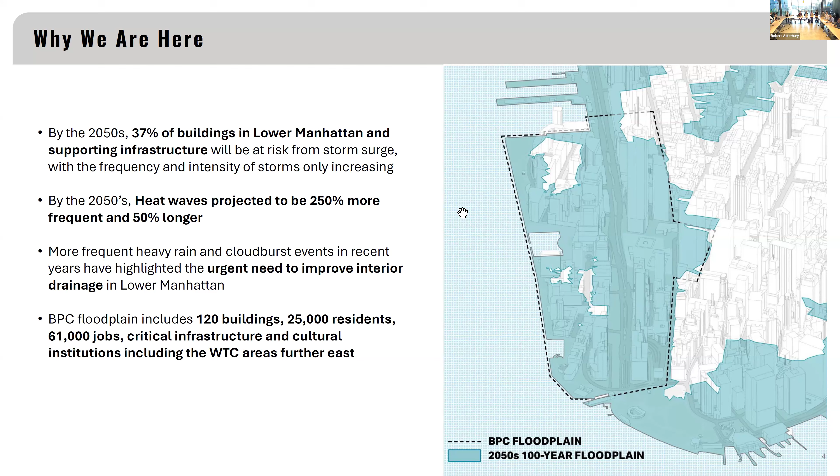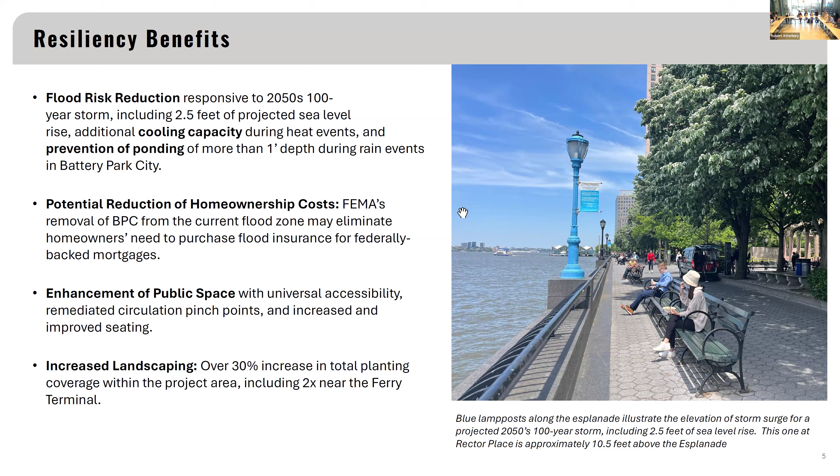The primary benefit is to provide flood risk reduction to everything within that floodplain. But there are also peripheral benefits, including potential reduction of homeownership costs when we remove that area from FEMA's maps, and attendant enhancement of public space. As we move along, we have the opportunity to refresh some of Battery Park City's public realm, as well as increased landscaping. As you know, Battery Park City is about one third parks, so parks, parks operations, and landscaping is always front of mind for us.

For those unfamiliar, the Lower Manhattan Coastal Resiliency Project is composed of 6 projects, 2 of which are Battery Park City projects. The South Battery Park City project, shown in the lower left, is just getting wrapped up now, and we're just breaking ground on the Northwest project, which I'm here to talk about today.

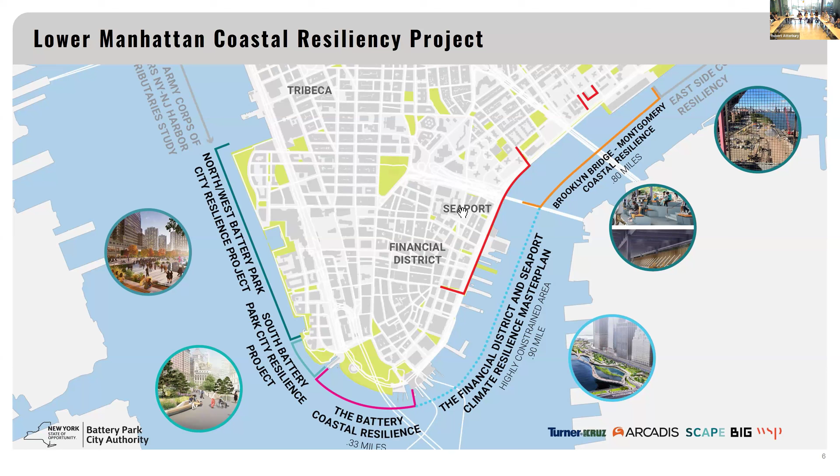Planning for this project, part of a series of projects, goes back to 2007 when it was first conceived at the city level, and then Superstorm Sandy accelerated progress there.

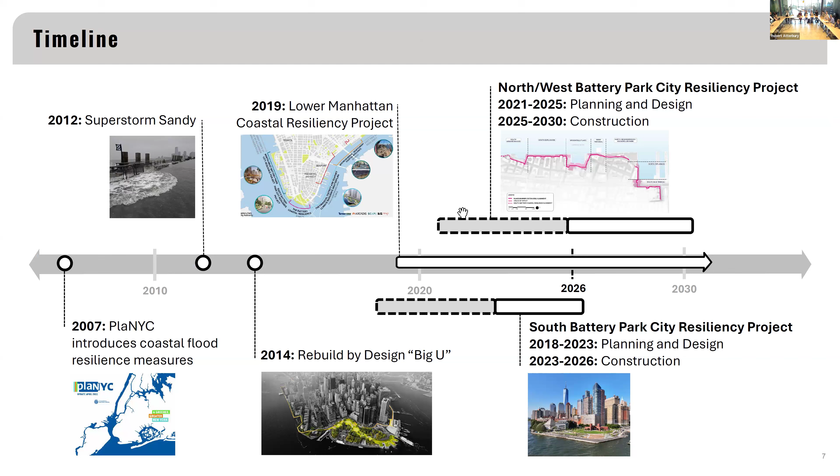You can see the thicker bolded lines are the South Battery Park City project and also the Northwest on the north side. As you might imagine, a project of this scale, spanning 1.4 miles of flood wall, has required cooperation among several entities from the federal to the state to the city level. Hudson River Park Trust has been a very nice partner throughout this.

We've also had a pretty robust community engagement effort, many large public meetings, a lot of site walks, ongoing CB1 dialogues, and HRPT specifically. I'm proud to say this is our 4th year in a row that we've come to HRPT in some public capacity.

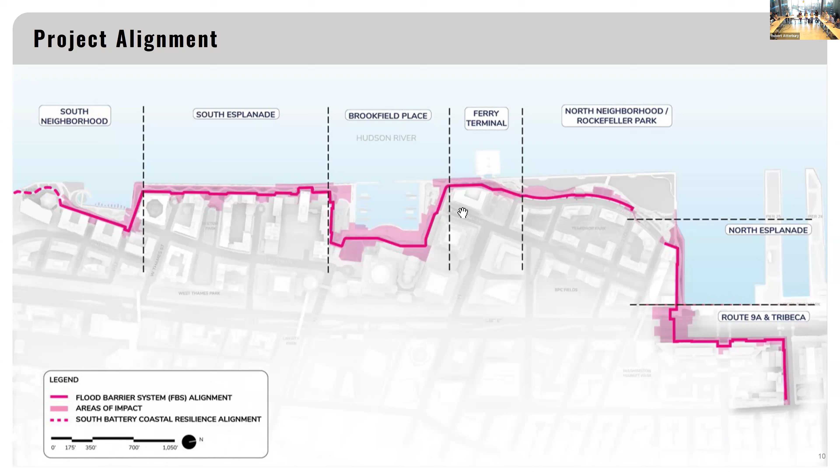Just as a reminder, this is the alignment. The dashed line on the left-hand side is where we tie into the South project, and then it's 1.4 miles along our esplanade until we get to the North Esplanade and across Route 9A into Tribeca. I'll be talking about that North Esplanade area today.

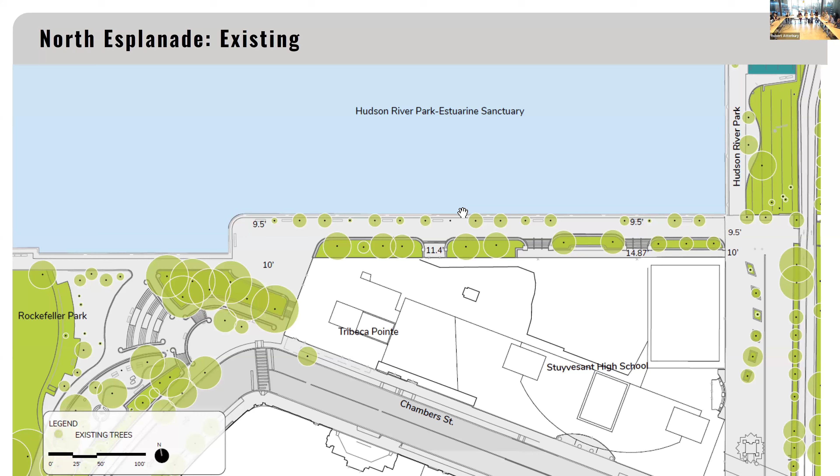So let's talk about the North Esplanade. This is existing - you're all familiar with the Hudson River Park Estuarine Sanctuary to the north. And then you can see the geometry has changed somewhat.

There's a dashed red line of what's existing now, and then you can see the geometry and space of what will happen after construction. Also to point out here, the red line that goes across Stuyvesant High School and across Route 9A, that's our flood wall, including gaps where there are deployable elements that only need to be deployed when there's a storm surge or a significant storm.

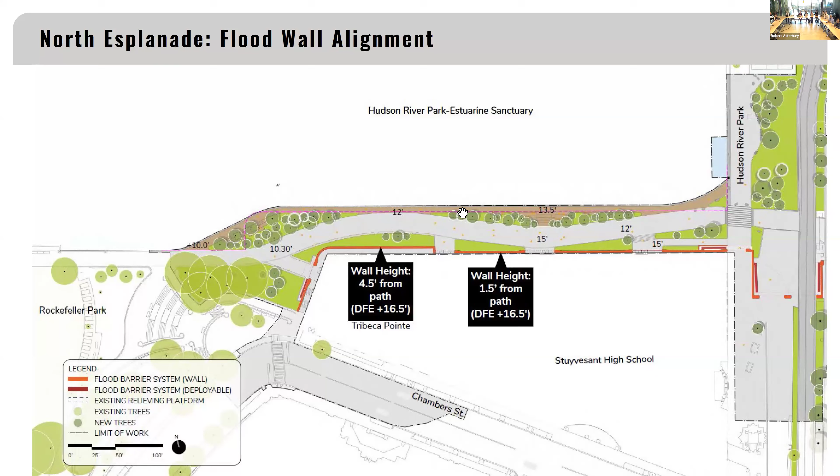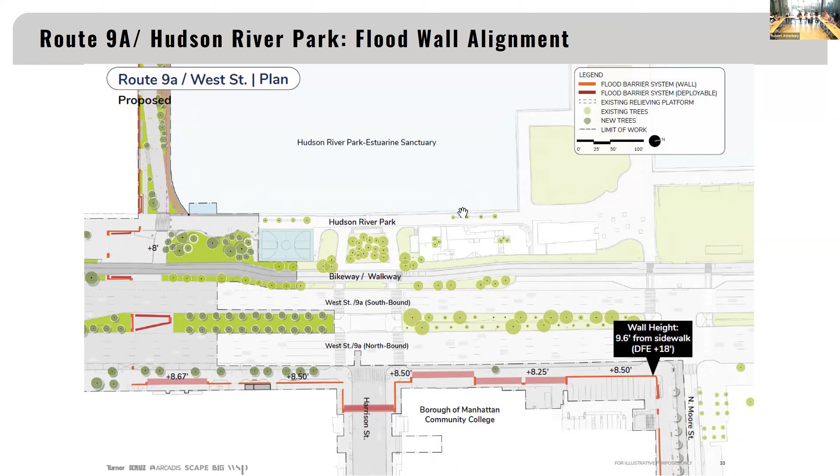Here's the proposed condition - this is a little bit confusing perhaps, but north is to the right here, and you see West Street 9A in the foreground and the Hudson River Park Estuarine Sanctuary on the top. You can see from Stuyvesant in the top left, we jog across 9A with a few deployables, a few rolling gates, a few swing gates, and then across BMCC heading north to North Moore Street.

Here is the relationship between the Hudson River Park Estuarine Sanctuary and the project. You can see we're bedfellows, and so we're happy to be here to present the progress.

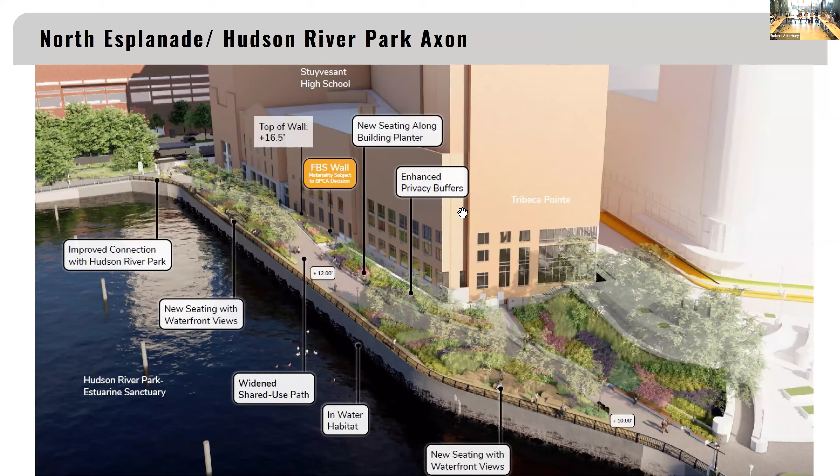Here's an existing shot looking west along that North Esplanade, and here's after construction. So here we have the opportunity, because there's no terra firma north of Stuyvesant, we're going to have to reconstruct the entire platform along the North Esplanade.

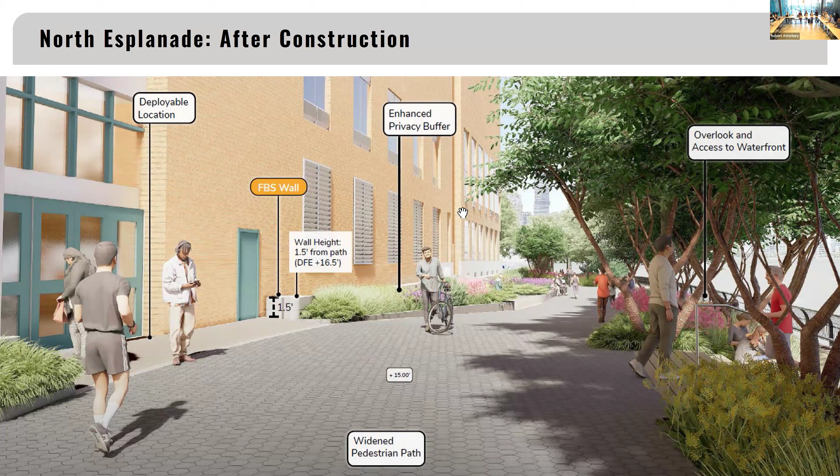And that gives us an opportunity to do two main things. One is raise the entire North Esplanade a few feet, and also make it so that the north entrance of Stuyvesant High School is universally accessible. Currently there's staircases, but after construction is done, you'll be able to get there via a wheelchair or a stroller, etc. Here's a little bit further west, looking west.

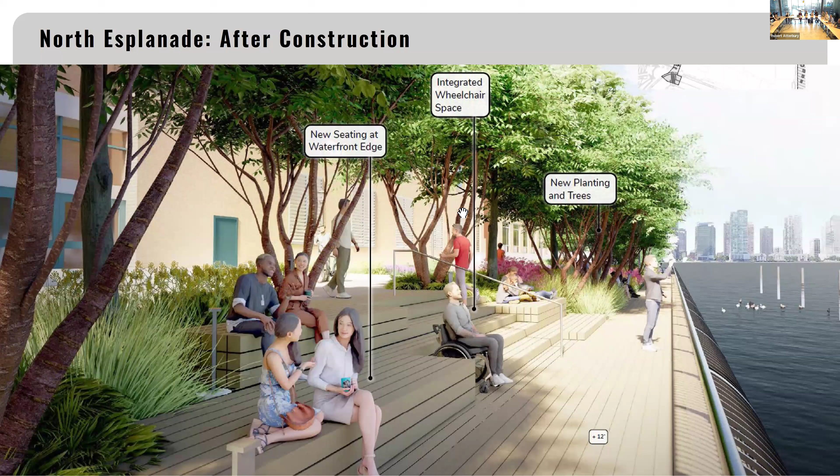We're also using that extra space from the Stuyvesant High School entrance down to the lower Esplanade to provide some extra seating and landscape areas.

So getting into HRPT relevant work - currently you may have noticed that there's a lot of work going on in Stuyvesant Plaza and along Route 9A. The main effort there is to install a tide gate, which, if you're not familiar, is a passive measure so that in the case of an extreme storm surge, it closes by itself and doesn't allow water to get further into our system. It's something required by DEP, so we're installing that now.

A lot of the work requires nighttime work because we've had to go into Route 9A, and DOT would not allow us to do that work during the day. So we've been working at night for some time. Pedestrian and bike access will be maintained throughout construction, going north-south and also onto the North Esplanade.

Looking ahead at what can be expected, we're going to continue the relocation of a water main and electric duct bank in Route 9A during that nighttime work. Then coming soon, we'll be installing what's called a support of excavation and start drilling piles to create that tide gate.

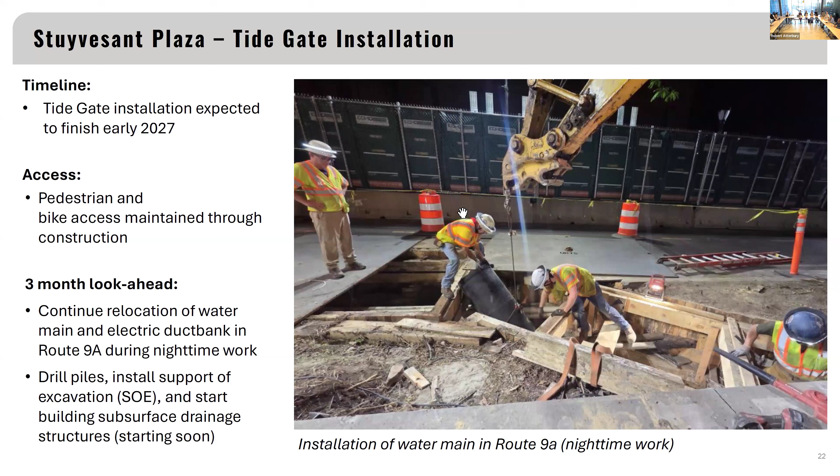So while we do the western part, which is about 75% of the platform, we'll be providing egress to the east side, and then it'll flip. Work will continue on the east side, and the platform construction will be complete on the west side.

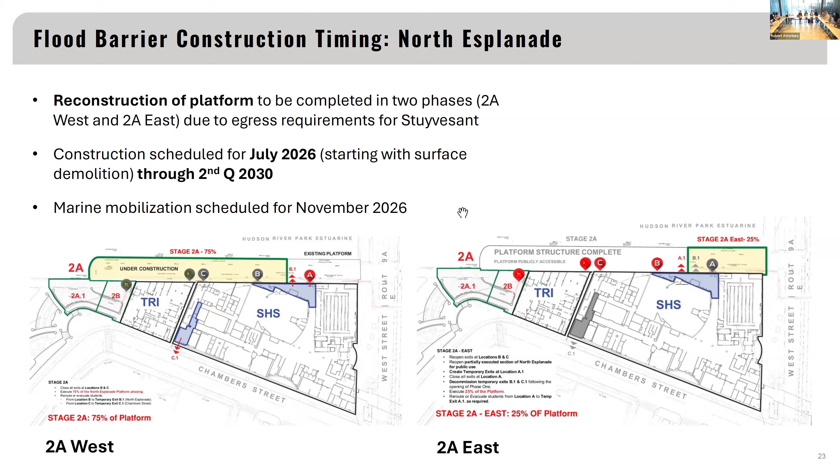As I mentioned, it's going to be 2 phases. Construction is slated to start in July 2026 with some surface demolition of the North Esplanade itself, but marine mobilization won't start until November 2026.

And then there's a seepage wall, which is basically, you can build your flood wall, but if you don't provide protection underneath, water can always come from underneath the wall and into your neighborhood. So the 126 IPP, the interlocking pipe piles, are basically metal piles all welded together to form a cohesive seepage wall underneath the wall, and that'll be up against Stuyvesant High School.

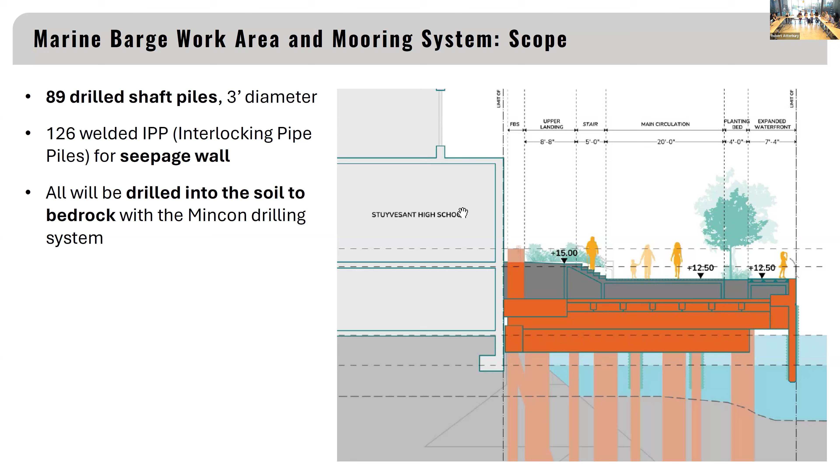All these piles will be drilled into bedrock way beneath the water and the soil to form a sufficiently strong system, and it's going to be done with Mincon drilling, which I understand is one of the quietest forms of drills available.

To get into specifics here, there are 32 moorings in the estuarine sanctuary, 16 of which will need to be disrupted during work, which is going to be from November through July of 2029, so a total of 32 months as conceived now.

You can see there's a restricted area, which is going to be for marine traffic further to the west, and the actual marine barge work will be a little bit further east. The 16 of the 32 on the south side will need to be removed while this work continues, but the 16 north of that can be used without interruption.

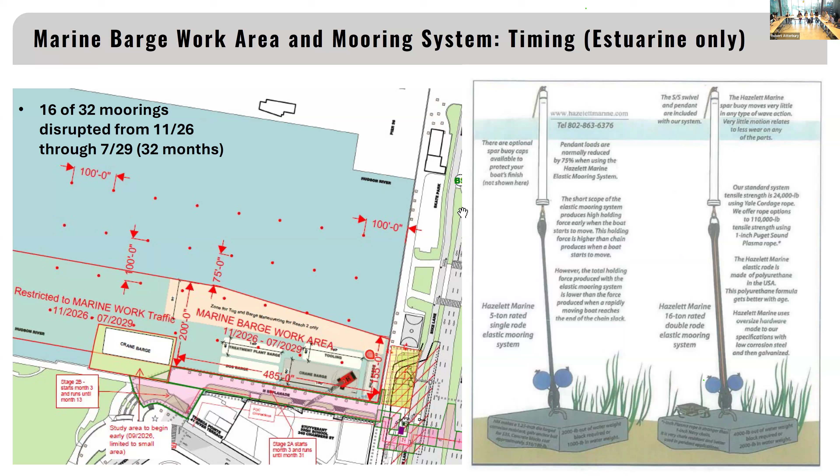The image on the right is actually from Hudson River Park. These are the types of moorings, as we understand it, to be in that area.

Also, there are going to be buoys placed to make sure it's a safe construction area. There will be buoys that mark a restricted work area and zone, and also buoys that mark a slow or no wake zone during construction.

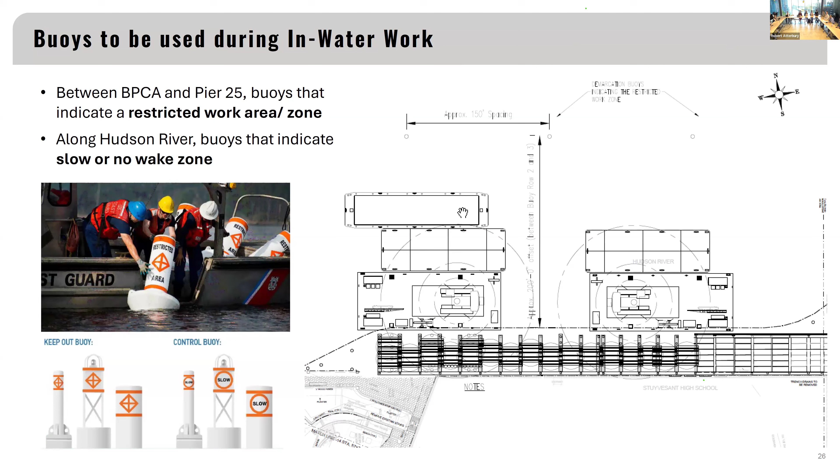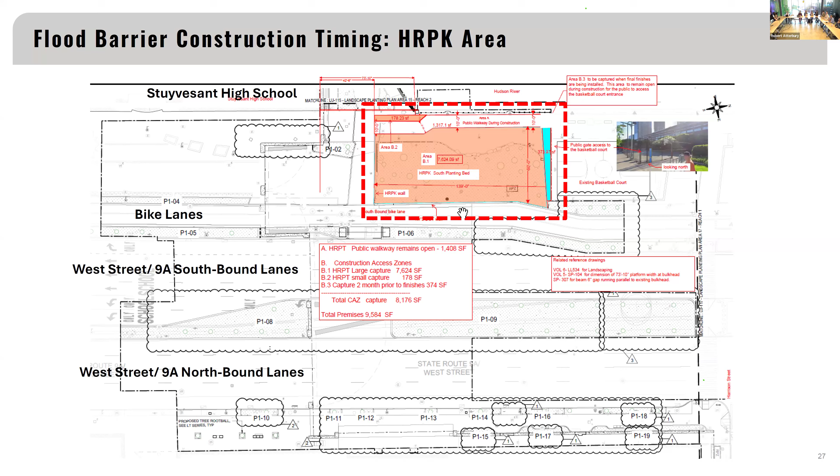So let's zoom into that area next. Area B1 has already been captured, ongoing through construction of this area, which is through the middle of 2030. B2, which is basically where that geometry changes as it reaches the current rail, is a fairly small capture that will begin when marine work starts, so that'll be in November.

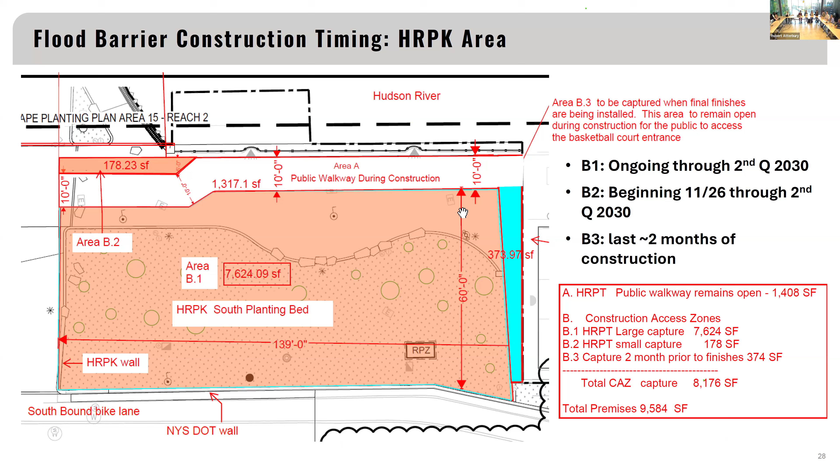And then B3, which is not very clearly represented here, but it's that light blue color, that's just some hardscape updating that'll take place right at the end of construction, approximately the last 2 months. I'm happy to return to the slide if anyone has questions, because it's kind of confusing.

Okay, so also I wanted to give you an update on where we are with habitat enhancement. We recently met with Robert and his team to get on the same page with this, and I think we're all simpatico about the decisions moving forward. The left side is a rendering showing basically how we're improving the habitat below the water, and some of the types of fish and marine life that we're hoping to attract.

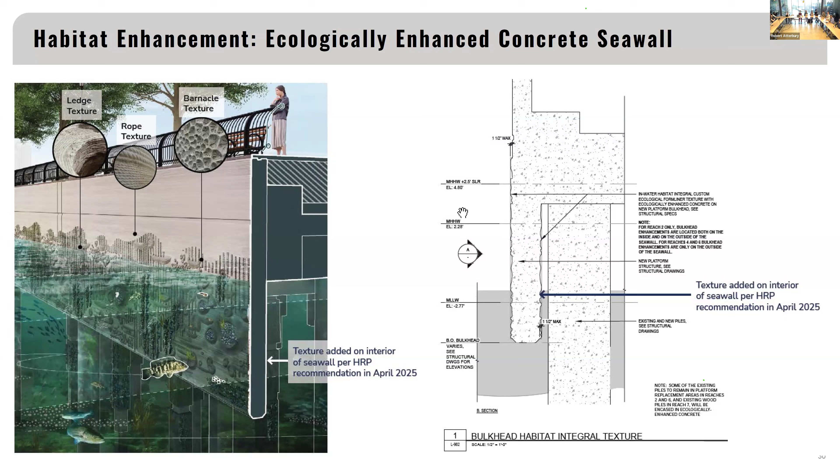Based on conversations with HRPT last April, they suggested putting the same texture on the inside, below the esplanade, and we've since done that as well.

In addition to the habitat on the seawall itself, that's kind of the outside border of the North Esplanade, we're also taking advantage of the piles that are currently there to encase with another type of texture that we're hoping will also attract some habitat there. So it's not going to be on the new piles, it will only be on the existing piles, 51 in total underneath that North Esplanade.

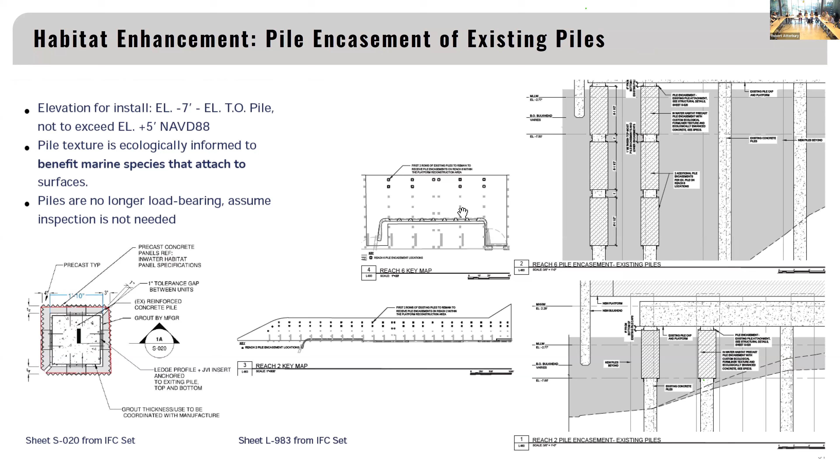And it's very exciting, we're already starting to visit some mock-ups. This is in Elizabeth, New Jersey, where we're producing the pile encasements, so work is progressing. I know that was fast, I'm happy to return to any slide for further discussion.

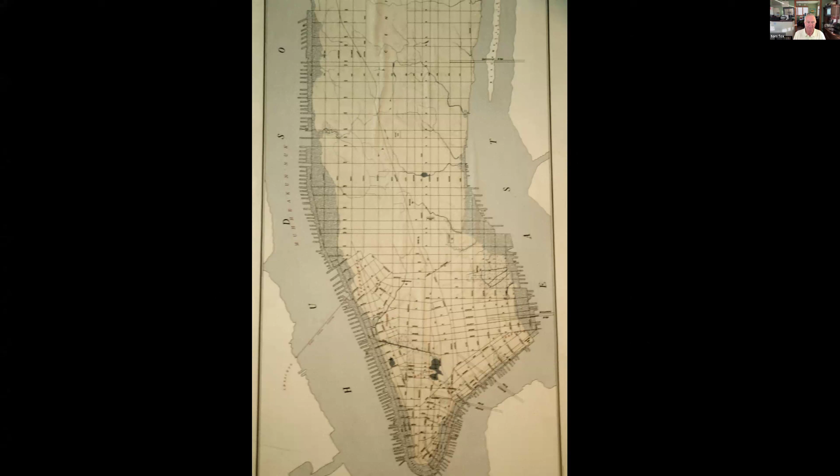As everybody knows, the west side of Manhattan was all filled in, and it bristled with piers for break bulk cargo. It also had passenger ship terminals, and this is at its heyday in the 1950s. One thing unique about it is you can see the highway curls in - Manhattan had to be cut into to create this because the federal channel is sacrosanct in navigation.

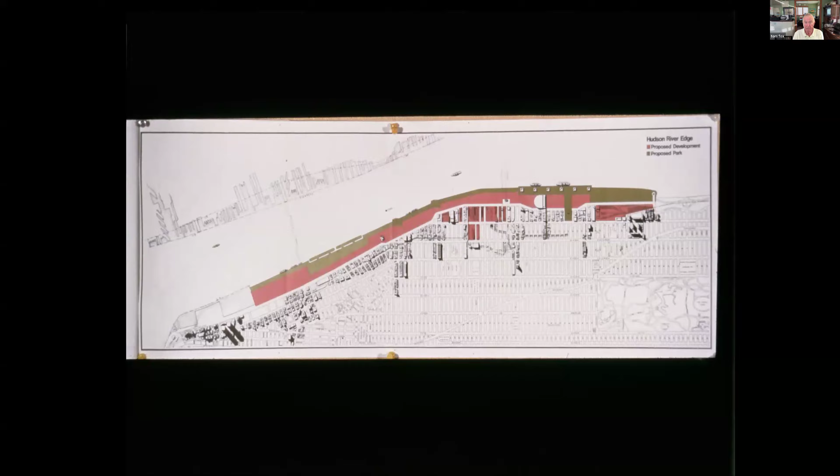The proposal was to fill it in all the way up to 59th Street. Some of us fought against it, and we were successful in getting the Hudson River Park started. The northern end of the park has always been a difficult section because of the fact that this is no longer in the park - the passenger ship terminals aren't.

So if you notice, this is just around 57th Street. This is early on, so it's 1988 maybe. The sanitation pier is under construction at 57. We came up with this vision plan, the first plan of what to do with the West Side waterfront.

And the northern section was treated generously. As you can see, Clinton Cove Park was very large. Half the head house was taken off Pier 94. Pier 94 was for public recreation and boat docking.

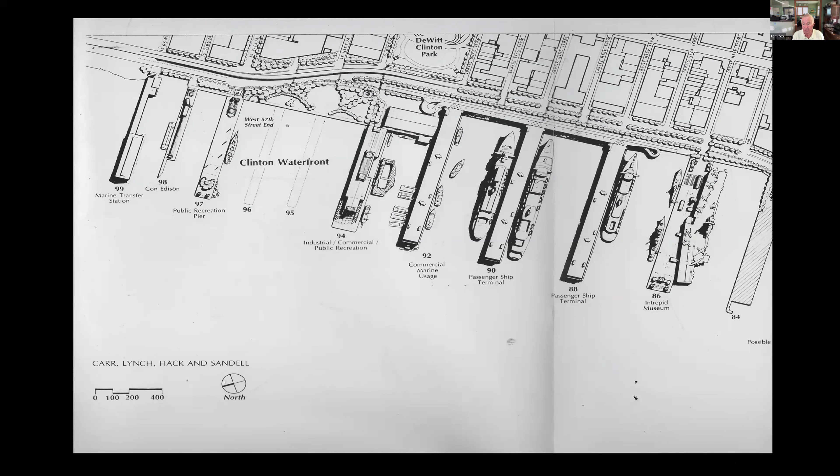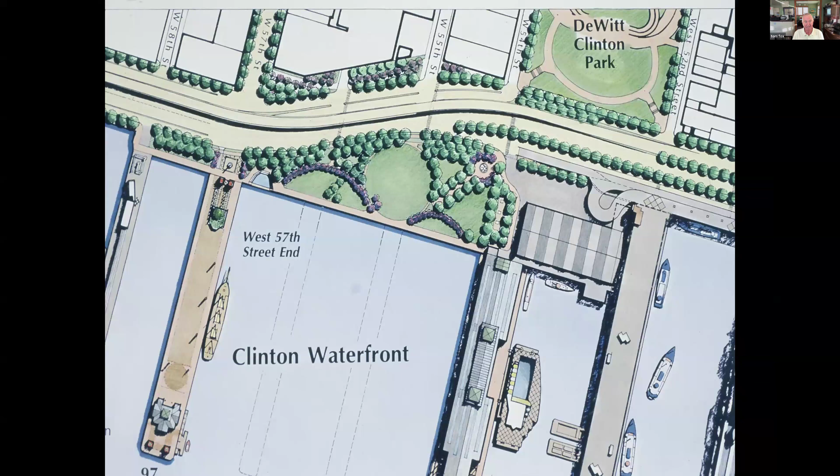Then the next plan, this is what it would have looked like at the time, envisioned. It was also envisioned that the passenger ship terminals would have a promenade right along the waterfront where people could walk along and look at the waterfront, which is what was going to happen prior to 9/11.

The final plan that came out treated this differently. As you can see, the entire head house for Pier 94 is gone. This was the final plan for the park.

But at the time, Mayor Giuliani wanted to take the passenger ship terminals out of the park. And just before the legislation was passed in 1998, they took them out of the park. This is from 1995. He took those two piers and said, we want to have an option on these two piers, which they had exercised.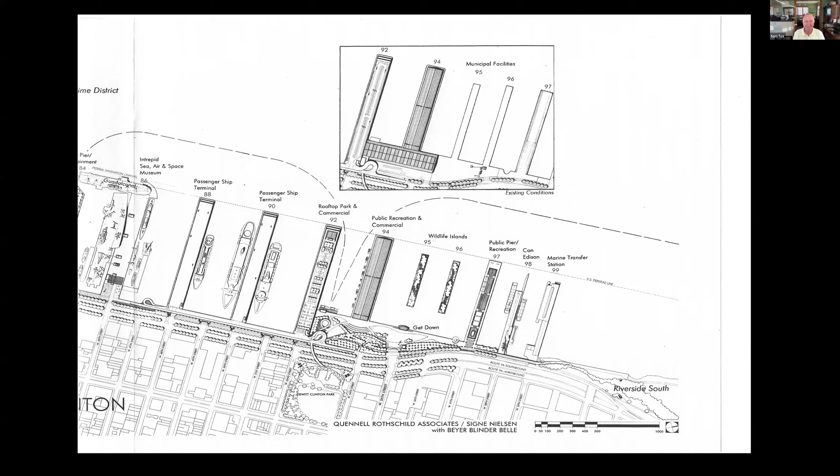So that whole section became not tennis courts on the roof and commercial navigation, but a trade show exhibition on Pier 94.

The park was built with a much smaller Clinton Cove, and you can see the huge pier shed. The huge pier shed is now a movie studio.

So the west side is, look at the view. The west side is being overwhelmed. This is a non-maritime use, may I add. It wouldn't have been allowed if it was in the park, but it was allowed because it belonged to EDC.

Now, every pier on the west side has been rebuilt, every pier, by a park corporation that makes no money. The passenger ship terminal has deteriorated to the point where this is a movie studio. Pier 92 was condemned 10 years ago. Pier 90 just was condemned 3 months ago.

And we've lost half of our cruise industry to Philadelphia. The cruise industry is a $420 million a year industry that has that impact on the city, and it supports 2,667 jobs. So we've just took a big economic hit, and it's being managed by the agency whose job is to make money for the city on a property that's producing revenue.

So it's confusing that this has fallen into the water while the rest of the waterfront has been rebuilt. And we're suggesting that instead of making the project even bigger like this, we should kind of go back to our roots. And that's what Danielle's going to present right now.

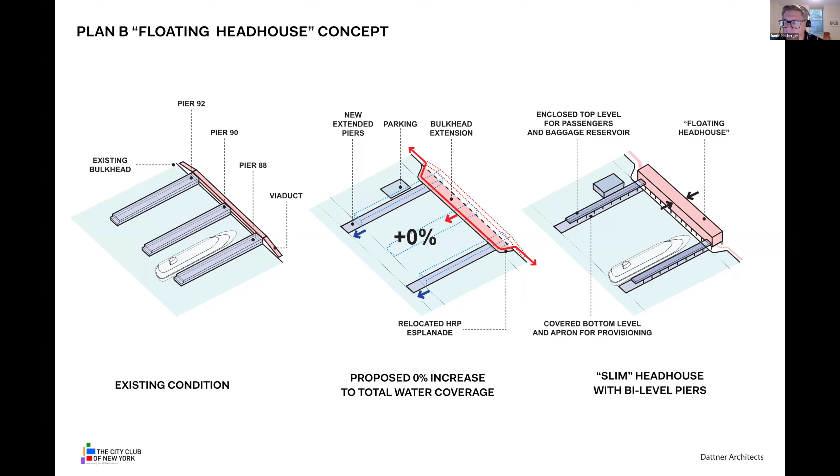So in order to make the cruise terminal as narrow as possible, we need some of that space, primarily for baggage storage and dispatching baggage. We're putting that back on the piers, where it actually exists today.

And then the roof of this terminal—since eventually the buildings on the east side of this highway are going to be transformed, probably becoming residential buildings—we have a planted roof. Some of this could be publicly accessible, some of it could be for the use of passengers in the cruise ship terminal as they're waiting to embark.

The way the building is organized is very similar to the master plan. Passengers who are departing go to the top floor of the building with their bags. They check in and are processed for security on the level below. Then the level below that is used for baggage laydown or for embarking onto the piers themselves.

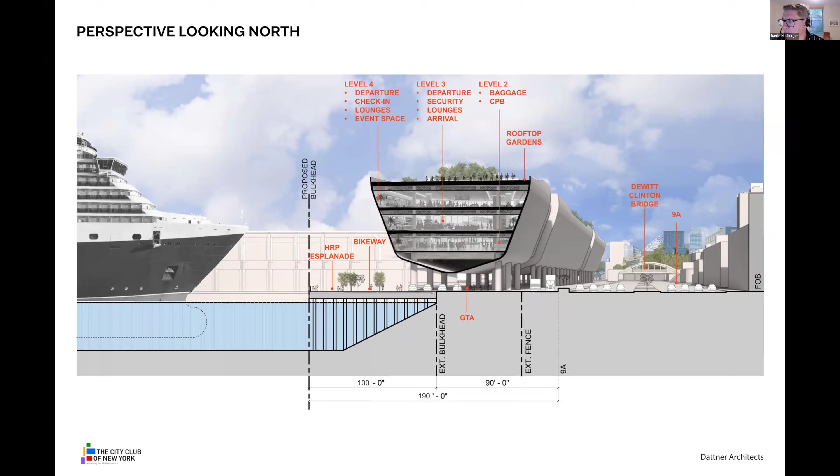And in order to make this work, we need a very efficient, very effective ground transportation area, as the ground level of the terminal is described, with the terminal floating overhead. And we have kept many of the features of the master plan, and that really has to do with the direction of circulation for traffic.

If they are arriving from a north direction on 9A, they make the turn at 47th Street, and if they're coming from the south, same turn at 47th Street. And then they would exit the site at 52nd Street.

The one exception to that movement for smaller vehicles is vehicles who are going to the parking lot, which is to the north of Pier 92. They will also come in by the north - this is the same as the master plan was predicting - or they could come from the south. And then they would drive out onto the lower level of the pier and then get to the parking deck.

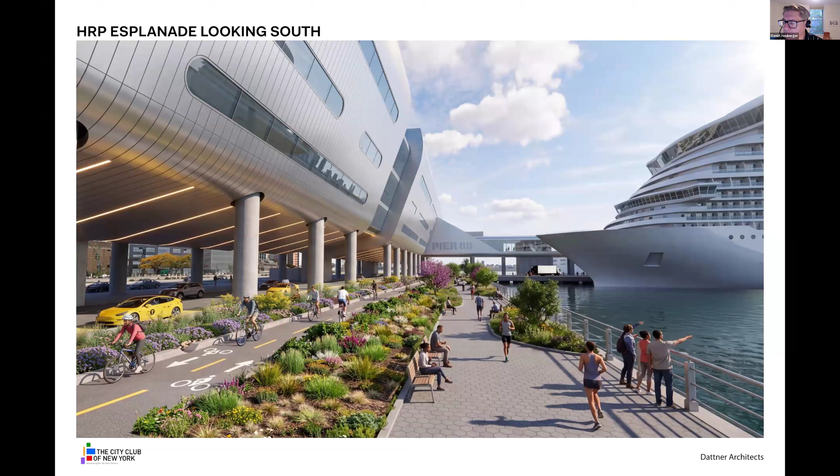And this is a concept rendering of what it would look like if you were on the esplanade. So obviously, river to the right, the esplanade, a buffer zone, the bike path in 2 directions, another buffer zone, the drop-off area, and then you can see under the building, you can see Route 9A beyond.

In this view, we're looking south, so you see Pier 88 in the distance. You see the connection from the terminal building to the gangway.

And what you can see at the lower level of the pier is a truck. The lower level of the pier is not for passengers - it's for staff and for provisioning vehicles and other service vehicles. Bags and passengers get to the ship on the upper level of the pier.

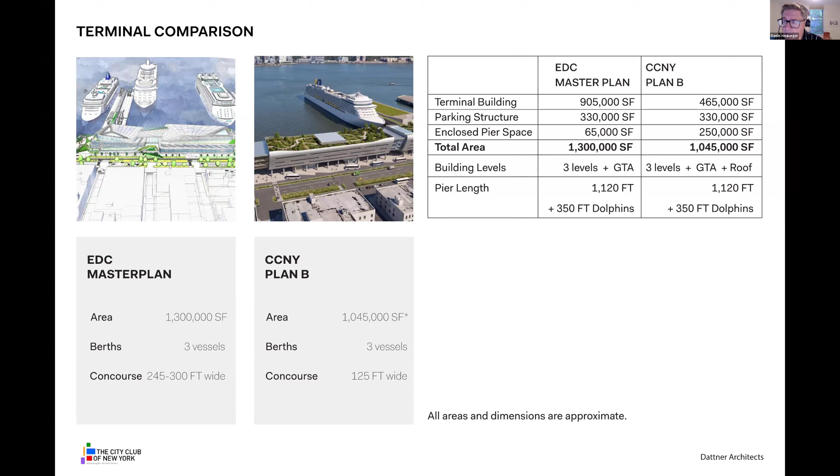You can see the concourse width for the EDC master plan is 245 to 300 feet deep. Our concourse is 125 feet, which is in keeping with all of the precedents that we showed you at the beginning of our presentation. And so here's what's going on.

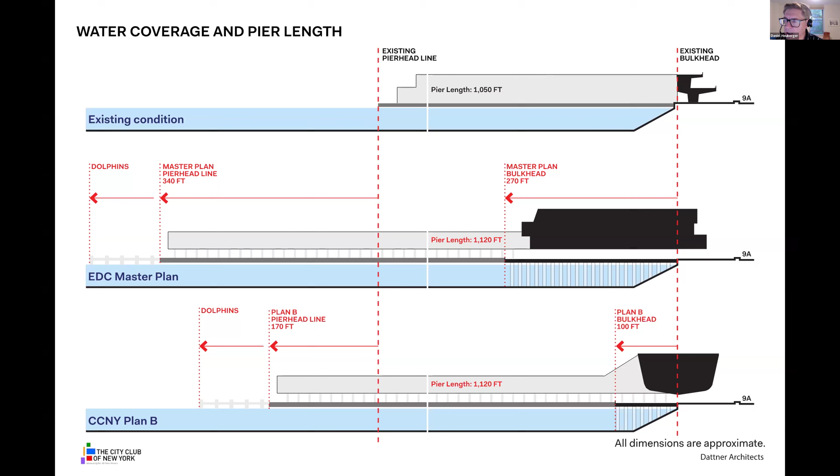I have to say all of these dimensions are a little bit approximate because the drawings we have were not actually dimensioned. So we did takeoffs, our best guesses, but I'd say they're fairly close in the ballpark.

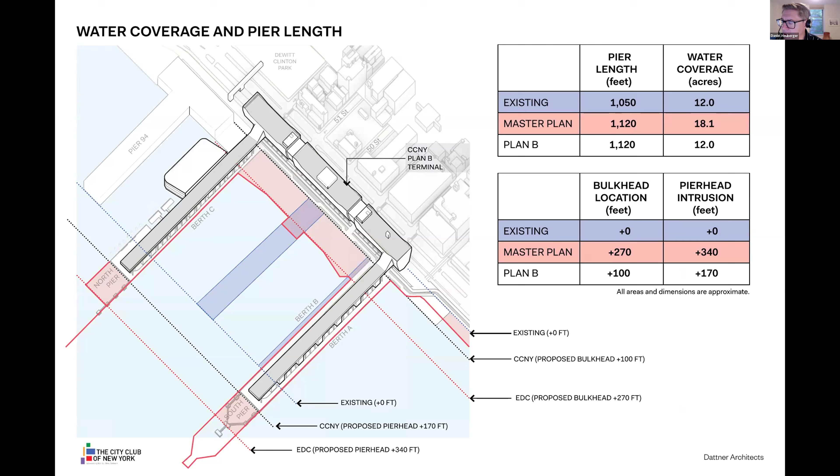This shows a comparison of the two footprints. The master plan is in red, the existing is in blue, and everything in white is ours or existing. This shows the two buildings side by side, so you can quickly see the comparison in volume and depth.

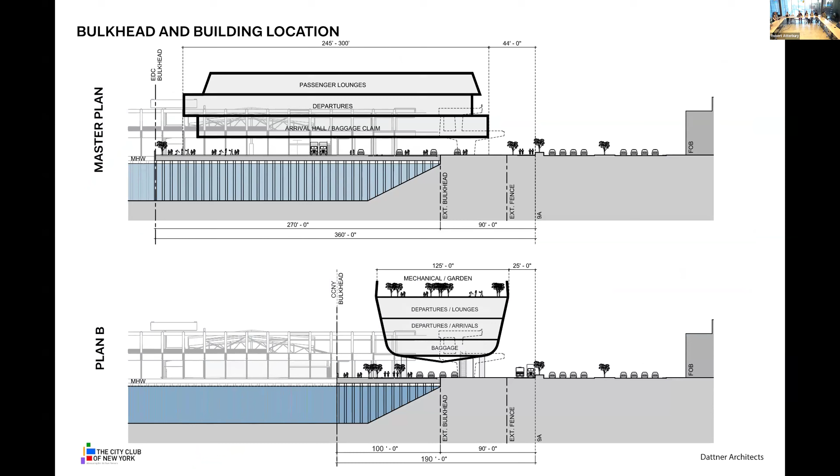These are the various elements of each of the two options. Here, the major point of comparison is the open space. In order to have a fair comparison, we are only considering open space that is open to the sky. Both schemes are comparable for the amount of sky exposure on the ground level, at 2.6 acres. But a lot of that space in our case is arranged along the waterfront, whereas it's divided between the highway side and the waterfront in the master plan.

Then we have the potential addition of rooftop terraces on top of the pier, which adds another 8 acres compared to the 2.4 acres of the master plan. So once you total those up, there's considerably more green open space, habitat, and public occupiable, planted area in Plan B.

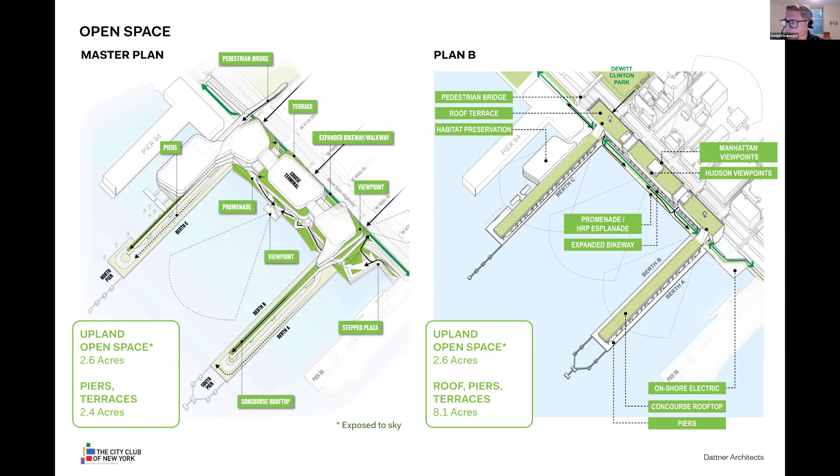Private vehicles, we've talked about this already, but essentially, it's actually exactly the same amount, both in type and in number.

This is a comparison of what the ground floor plane would look like, looking straight down, with the master plan on top. You can see the park area is split between a park that runs as it does now along 9A, and then something that is called a park in the master plan. But if you look at the gray line above where it says building above, you can see that a lot of that area is in fact underneath the building.

And then Plan B below, where everything is grouped, as you saw in the rendering, along the waterfront and is not below the building.

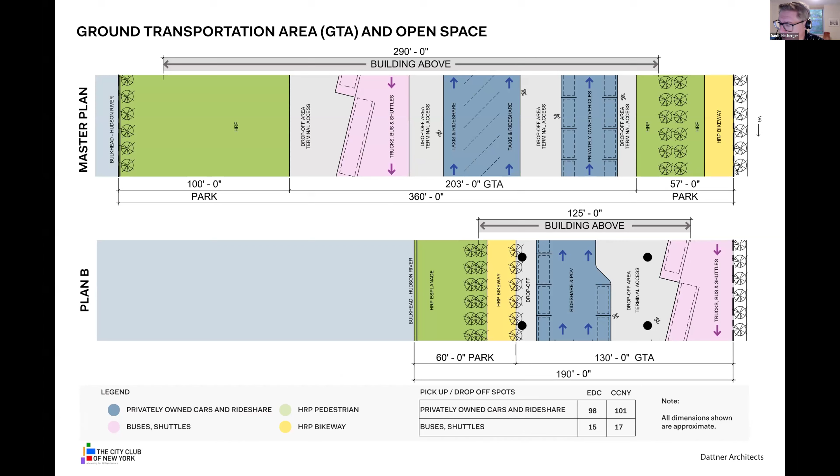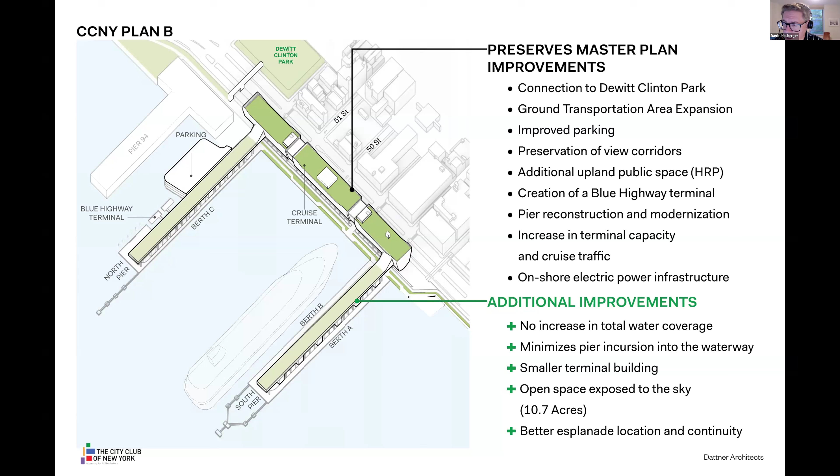So to sum it all up, we incorporated all of the many positive points of the master plan, but we made a number of improvements: trying to keep the amount of water coverage to net zero, minimizing the incursion into the waterway, which is a navigational concern, making the terminal building smaller, which is less intrusive, more efficient, and more economical, increasing the amount of potentially publicly accessible open space that's open to the sky, and really improving the Esplanade experience by keeping the park entirely along the river.

Here's a quick comparison. Obviously in red are the things that concerned us the most: water coverage, pier intrusion, and the size of the buildings.

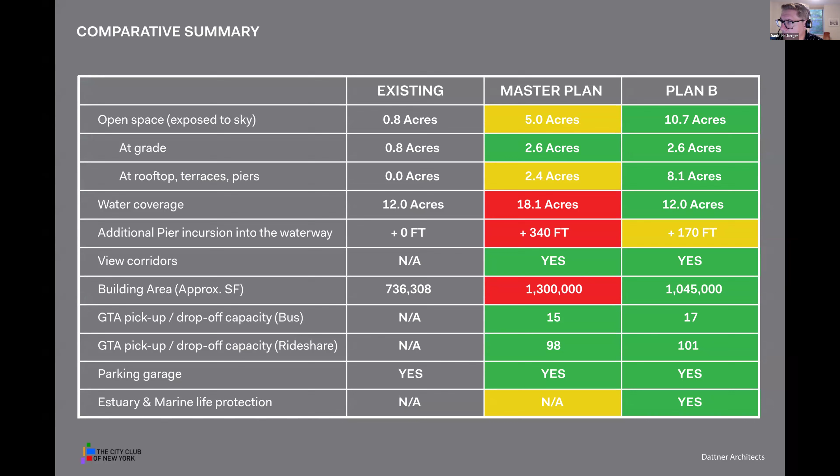In summary, we think there are certain key benefits here which would not only benefit the public, but benefit navigation on the water side, and hopefully benefit the city by having a more efficient and less costly option for the marine terminal. That's my presentation, thank you.

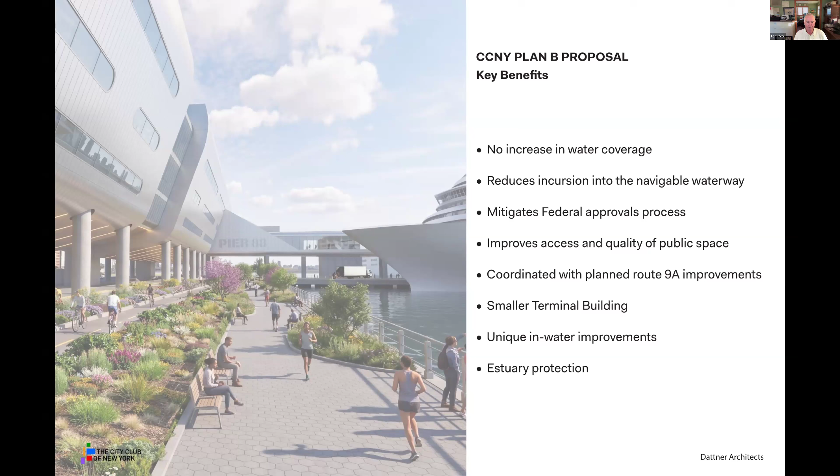Thank you, Daniel. Leslie: It's our hope that the advisory council might consider writing a letter to the trust, or bringing it up at one of the next trust board meetings, that there should be a consideration of a plan B, because time is money.

If you're going to try and cover 6 acres of the Hudson River Park estuary, it's not going to happen tomorrow. If you want shore power for those ships, we've got to get this done as expeditiously as possible. If we're building the same amount of water coverage, same amount of coverage in kind as Little Island did, then we won't have to go through rigorous environmental studies on the impacts or the lengthy review process and potential litigation subsequent to that review process.

So it really behooves the public to have a plan B, comparing apples to apples, which we tried to do, and we're hoping the advisory council might consider weighing in on this for the benefit of the park. As you can see, both to the estuary and the public spaces, it's a significant enhancement.

And the rooftops - just think of Pier 57. You go from the first deck to the rooftop, you never get into Google's space. Well, it's the same thing here. You can keep the security of the ferry terminal, and you can use the rooftops as a public park.

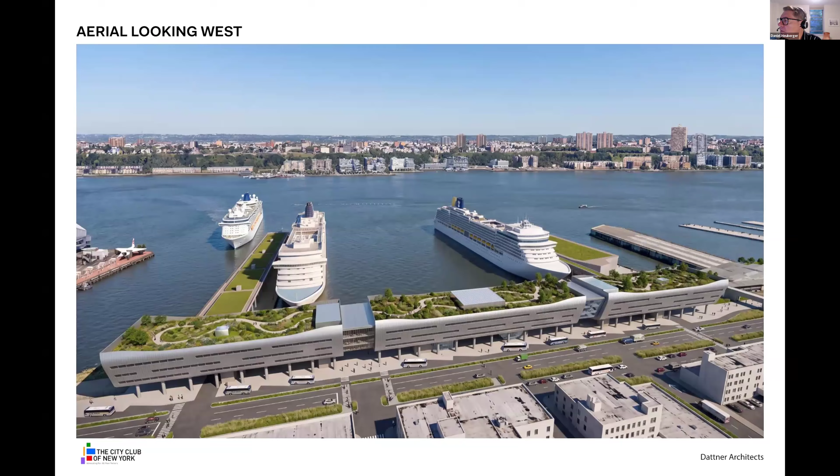What are their configurations? Could you bring up the design quickly, Daniel? It's easier to see visually. And to be fair, these are both conceptual designs, it's just theirs is quite different. Let me see if I can find a few images. Okay, there you go. So what the master plan is proposing is a 2-level pier.

So there is a deck at the height of the bulkhead, a conventional pier. Obviously it's going to be built up higher because of the new DFE and resiliency requirements, but a conventional pier deck.

What we're proposing is basically taking that narrow umbilical and making it much broader. Not quite as broad as the level below, because basically we have an apron that sees the sky, and that's where you have the cranes, just like you have now on the piers. But you have a central spine, which is large enough to accommodate passengers and baggage, and by having all of that extra room for baggage, the baggage is moving from the ships to the pier.

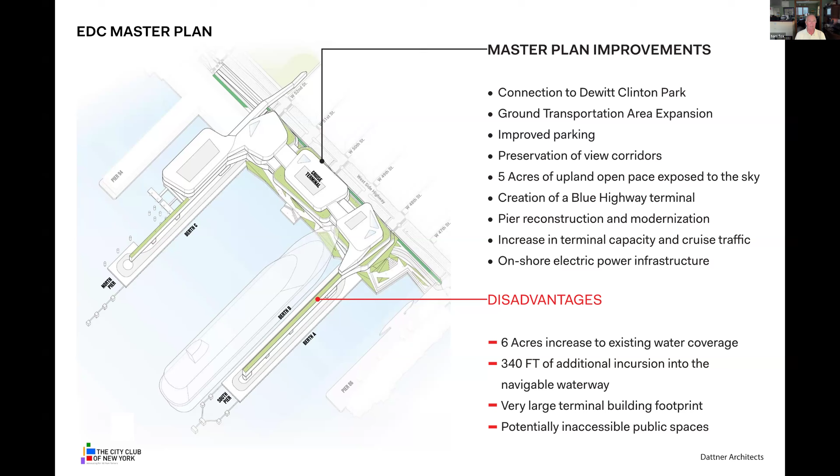The alternative, Daniel, while you're saying that? Yeah, let me. That's fine, I think you've answered the question. It's two levels. That's basically it.

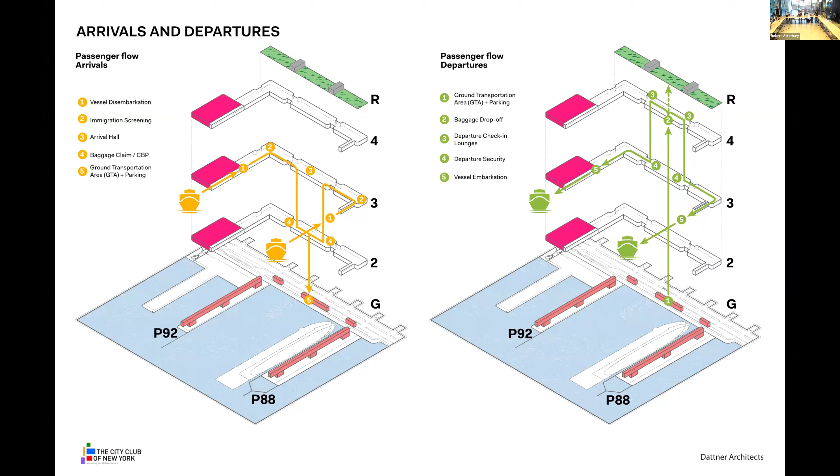Quickly, sorry, just quickly, and this may be my own reaction to the term Plan B, but if this were to move forward, I might suggest we refer to it as an alternate plan that addresses concerns with the EDC master plan. Plan B, to me, just suggests something different. Thank you, point taken.

And I just want to let everyone know where CB4 is at on this, because we've been in it for many years in very detail. We really appreciate Tom's plan, we heard it at one of our meetings, and we really enjoyed it, and we were very positive about it and liked a lot of the elements. But what's very important to consider is that it's very, very conceptual, considering what the master plan was that the EDC presented. It's extremely conceptual.

So we talked to the EDC about maybe incorporating a lot of these elements into the master plan. But for example, one or two examples: CB4 is pretty insistent on having the rooftop be all solar or some sort of sustainable energy, so we could have that sustainable energy that fuels, quote unquote, the terminal. That was something we were very, very adamant about.

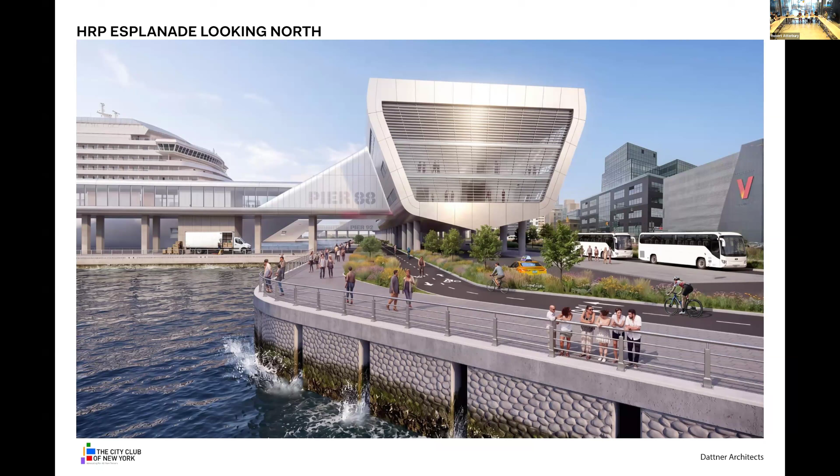The other thing is, and I know Tom you mentioned this, but the substation is significant. The structure is significant, and it's nowhere in this conceptual plan. It could be put in somewhere here, but that substation, which is now part of a plaza in the master plan from EDC, is big.

It's great, it's not here. And if we put it in here, that's great, but it's definitely going to hit every other aspect, the pedestrian path, the bikeway, then everything else kind of dominoes effects on it.

Actually, sorry for interrupting, it is shown. So if you look, it's right here on the screen. Can you see it? On the water. It's a concrete pad, basically. It does not interrupt the esplanade of the park or the bike path, which goes around it.

It's right here, almost the same location that the master plan shows it. Basically just that part is going to jut out, that little part. That makes sense. So it's the same size. Obviously that would have to be verified with EDC. We assume EDC's plan is correctly sized, and the logic is the same.

The power is coming from Con Ed, being generated at the 59th Street Con Ed plant, and is coming north. And Hector, just to answer your question, phase 1 has already been approved for getting from the Con Ed inland energy to go underneath the West Side Highway. So that's phase 1, as it goes in phases.

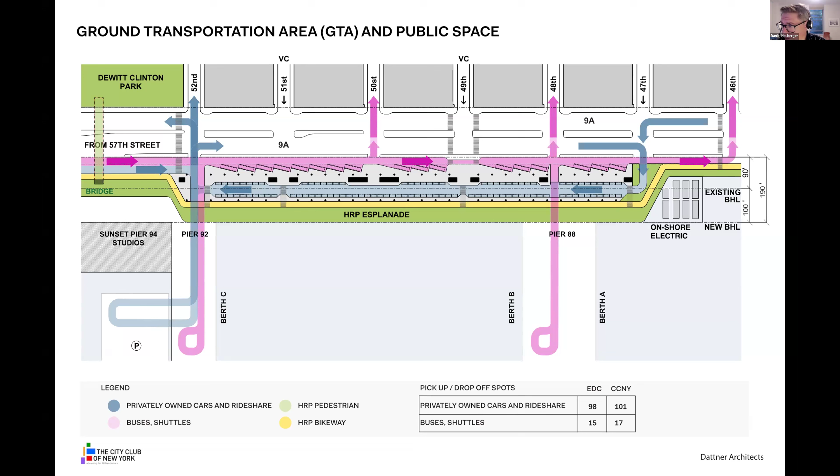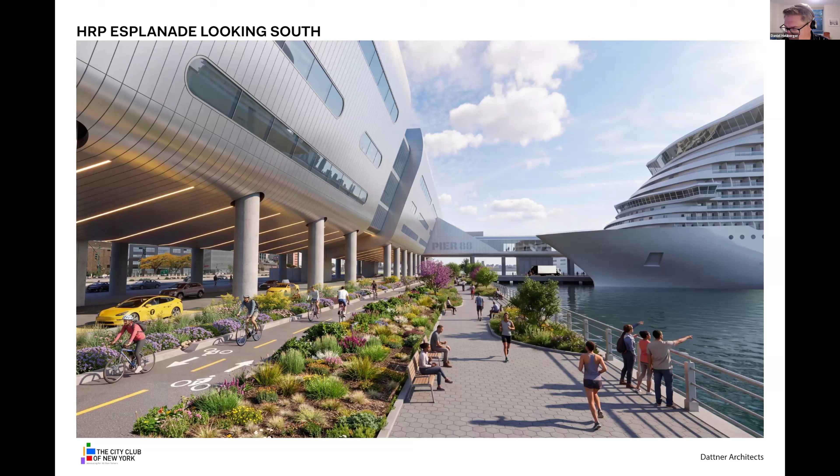Leslie, just another thing - the piers themselves are publicly accessible in the master plan, just FYI. They're public concourse rooftops, so they are potentially accessible in our scheme too. And you see that diagonal, that's because there is something coming down. In this case, we thought if we have a rooftop park, it could come down onto that pier. Obviously all of this has security implications and would have to be approved by the operators, but physically there is a connection.

Daniel, I just want to say we were really impressed. There's some really great alternative elements in here. Thank you. I mean, we couldn't even see why they wouldn't be workable. It's really great, we were really impressed.

Leslie, if I could respectfully disagree with the solar rooftop. Open space is so critical in the city, and I say we because I have a little bit of ownership of the park itself. We lost a lot of Clinton Cove Park when Pier 94 was rudely built the size that it was. Having access to 4 acres of open space on roofs, similar to Pier 57 - if you've ever been up there, it's beautiful - would be, I think, the trade-off between that and solar, given the fact that this building is going to be facilitated directly with that power plant. It might be a reasonable trade-off from a breathing perspective, a green roof perspective, and a public space perspective, to consider the park as an alternative. That's all.

Great, thank you. Okay, anyone else online or in the room? No? Okay, any motions? No? Okay, Tom. That's why I'm asking if there's a motion. If there's a motion. Well, what we would like to have - hold on one second, sorry.